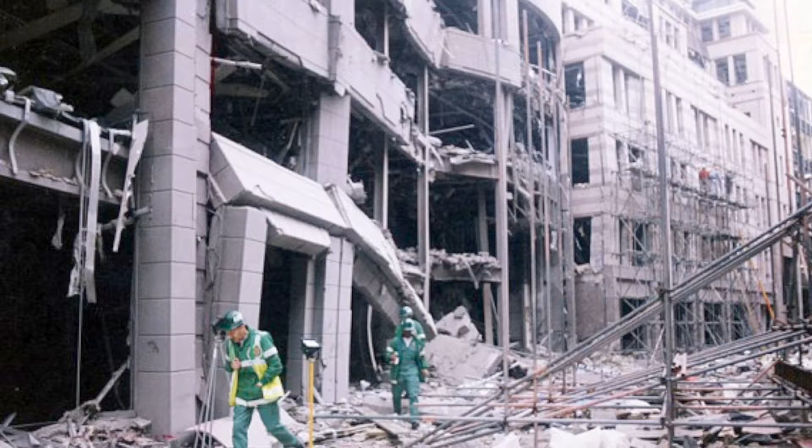Initially, a skyscraper known as Millennium Tower was proposed, but rejected as it was far too tall. A new scheme for a ground scraper got planning permission. However, as there was no demand, this building was never built. This led to a new project.

My role on that project was rather like being the conductor of an orchestra. That was my job. At the end of the day, somebody has to make a decision and somebody has to take the lead, and that is the project director's role.

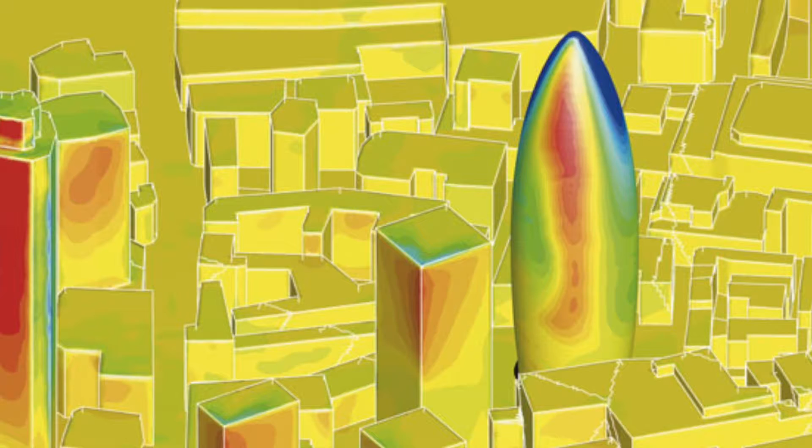I had the most talented team you could ever imagine. I had the best engineers you could choose to work with, the best M&E and structural engineers, acousticians. I had a phenomenal client, but they wanted a building of 600,000 square feet.

When we started discussions with Peter Rees in the city, Peter said, 'No, 300,000 — that's all that can fit on the site.' Cutting a very long story short, we ended up agreeing roughly in the middle, 450,000 net.

It's got to look right on the skyline now, that's the only debate. And it's looking a little bit plump. We think you should add three floors to the height of the building.

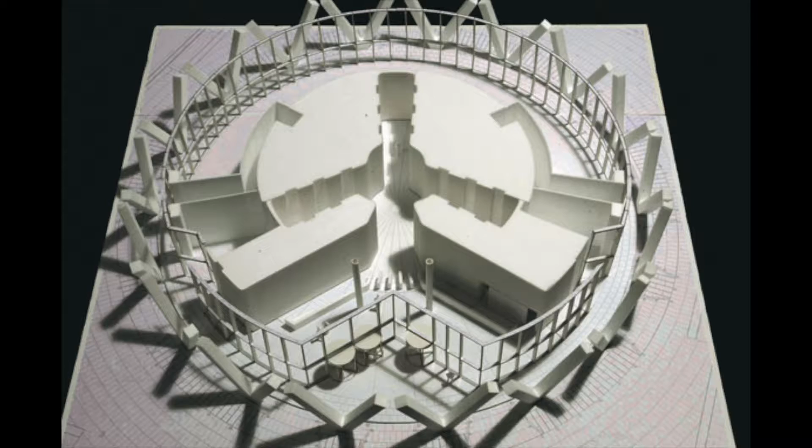Hang on a minute, sorry — add three floors to the height of the building? Because this is us thinking it's going to be kept down, kept lower.

The biggest impact I probably had was on squeezing the pumpkin to make it into a gherkin. Peter has always taken credit for encouraging the team to increase the height of the building, which we all agreed did result in a more pleasing form.

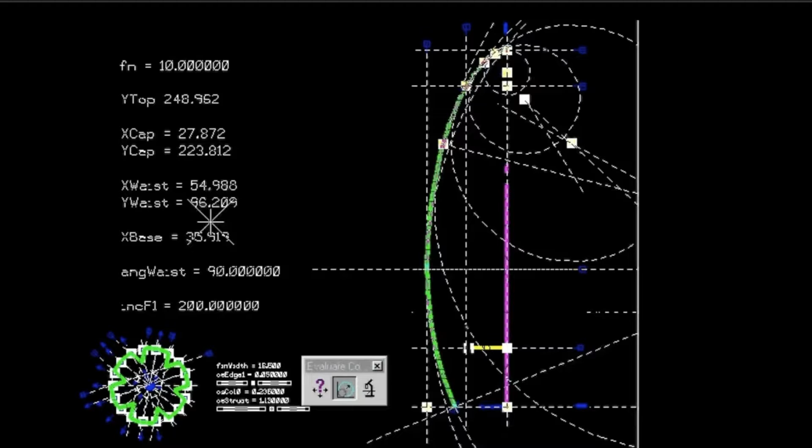So if you're asking who designed the building, well, I'm sorry, Paul Valloway and Peter Rees had just as big a hand in it as anybody else, because that call to add those extra three floors was fundamental to the elegance of that building. That building is only just elegant.

Ground scraper, in fact, was where it started, and it started to get taller. It didn't start with a great big 'we're going to be the biggest, the tallest, and the best.'

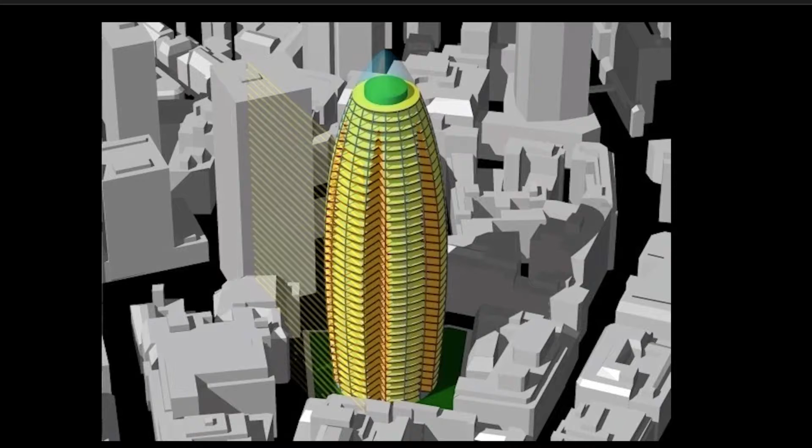It was the first tall building in London in 27 years — that's a generation. So the current generation had never, ever dealt with a tall building, either at planning or at a political level. Nobody knew how to deal with it. Politicians grant planning permission, so it was as much a political decision as it was a planning and an educated assessment.

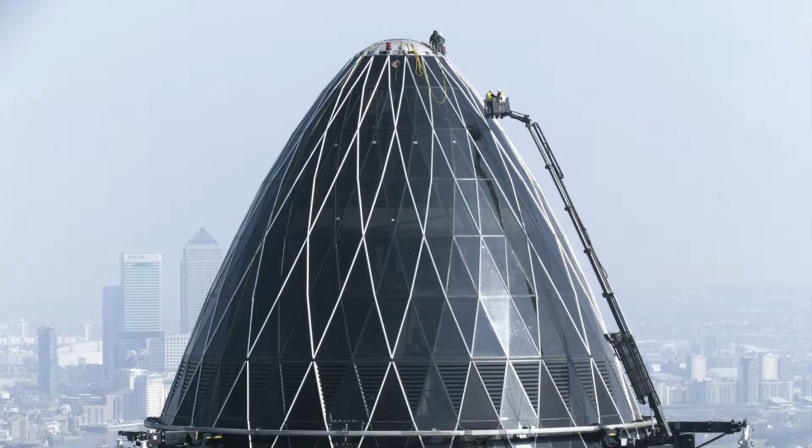However, an issue arose late on in the construction phase. There was a moment involving the cleaning rails — these two rails right up near the top. When those cleaning rails got installed, I got a phone call from Peter Rees saying, 'I didn't approve those rails, get rid of them.'

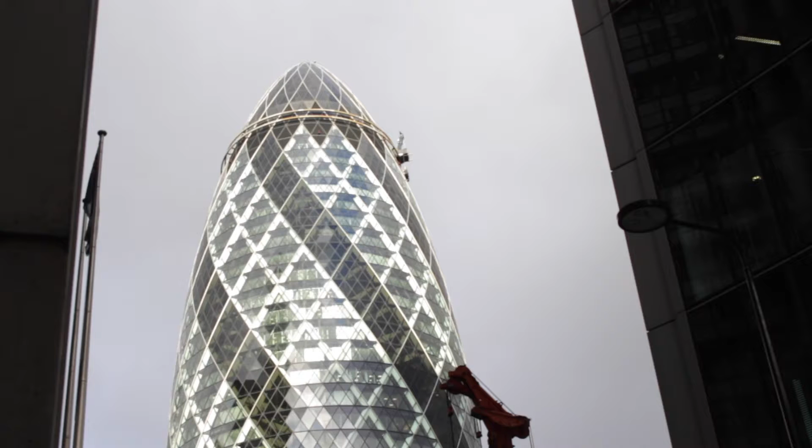'Peter, you don't understand, I can't get rid of them.' 'I don't care, I didn't approve them.' Peter had felt that the rails were entirely temporary. We knew they weren't, and they were shown on the planning drawings.

In the end, they had to accept that they should have asked for permission, and they apologised. But then, on the other hand, we had to give them permission because things were too far advanced. That nearly ended in tears.

If Peter had been able to enforce the removal of those cleaning rails, the building would still not be open today — absolutely way too late to be taking those babies off. I think in the end, Peter realised, whilst he would have liked to have done away with them, there was no other option.